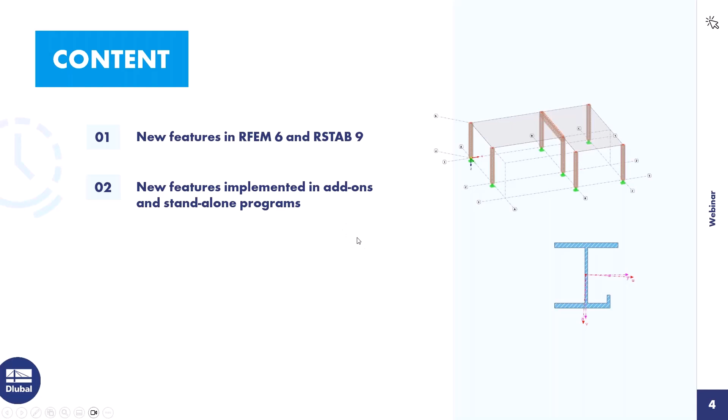Okay, then I come to the agenda today. First point is new features in RFEM 6 and RSTAB 9. I introduce some features that we implemented in about the last year. Then new features implemented in the add-ons and standalone programs. The first point is for features that are directly in the main program, and those features are in the add-ons and standalone programs. Then I introduce new add-ons, and the last point is prospects. I give an overview of what we schedule to implement in the next time.

The main presentation is in PowerPoint, but I will also introduce some features directly in the program, but only for features that are in RFEM 6. I think those are the features that most of you are interested in.

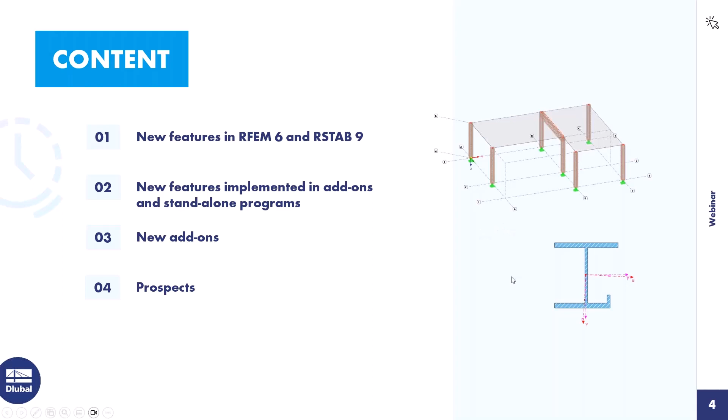Okay, then I come to the first point, new features in RFEM 6 and RSTAB 9. First feature, support force transfer from other model. We implemented a load wizard for that, and you can transfer reaction forces as nodal or line loads from one to the other model. I will show that in the program.

But I turn already to the next feature, new interfaces. We implemented the Tekla Structures bidirectional interface, then the STEP interface, then RSF for Allplan, and SVG. Those are vector graphics. So then I turn to the program and I introduce the first feature, the load wizard for the support force transfer.

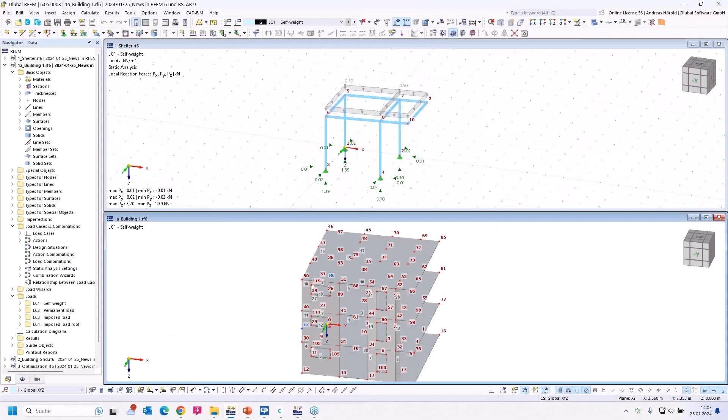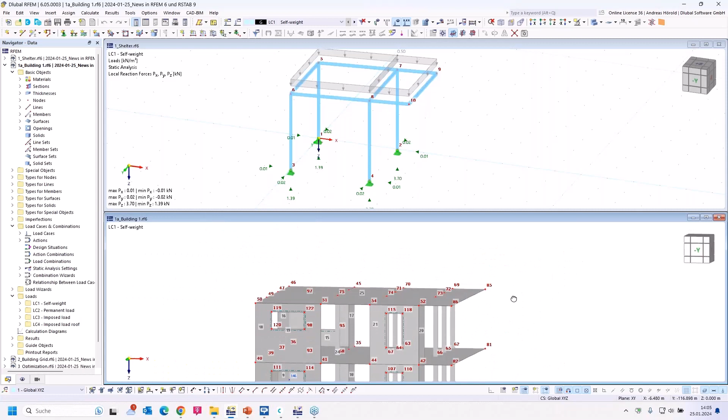So I prepared those two models. That's a small shelter that should stand on that roof here. And the 4 columns should stand on these 4 points. I select only the roof slab so that we get a better overview. So that's quite better.

And now I turn in the menu to Insert, Load Wizards, where you can see all the load wizards, the member loads wizard, and snow load and wind load wizards. And that's the new wizard. And I open it. Important information: when you want to transfer a load from one to the other model, the models must be placed in one folder in the Dlubal Center.

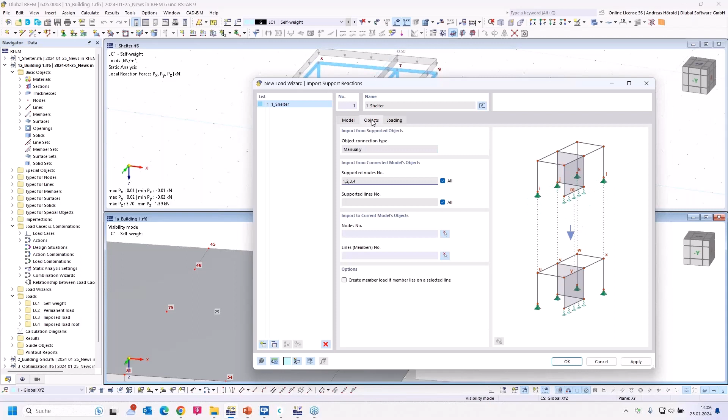So I have several models in one folder. Those are the models for today, and that's number 1. And the shelter is correct for the building, that's why we can leave that. I turn to the next menu, objects.

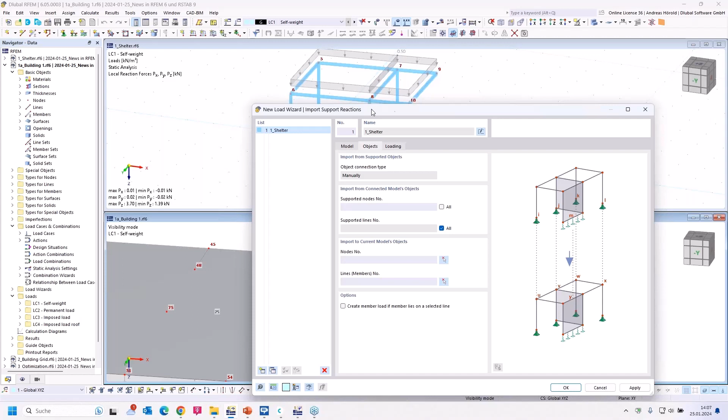You can select the supported nodes in the shelter model. I can select all or only different nodes, when, for example, not all columns should stand on the next model. Okay, I select all. We have only nodal loads, no line loads, but it would be the same workflow.

If you have, for example, under those line supports a member in this model, then you can check that to create member loads on the selected line. Then we turn to loading. You can apply the line loads as uniform load or varying load. That depends on you.

Then you can choose the connection type manually or automatically. Manually, you can select the different load cases and so on. I have in the shelter model only one load case. That's why I can do that automatically. But you can define in this table all the different load cases: load case 1 to load case 1, load case 2 to load case 2, or something like that, if you want. Then you have to select the direction.

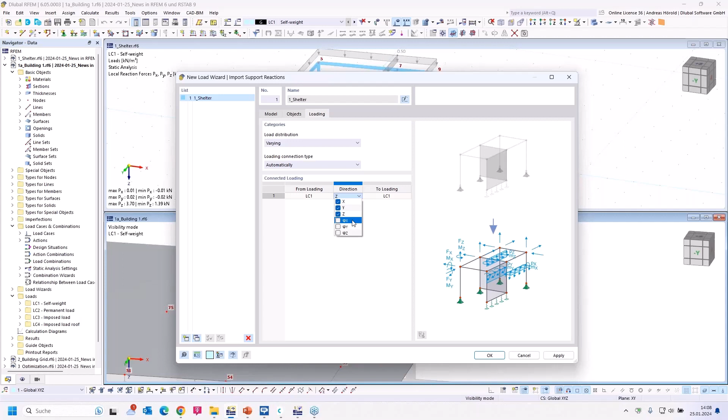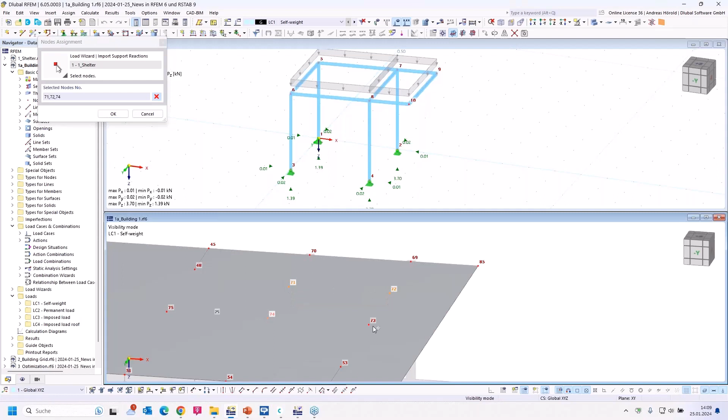I select all three directions. You can also transfer moments if you have a rigid nodal support, for example. Okay, that's all. So, I forgot something. I have to select the nodes in the building model. So I select them in the right order. Okay, now all is fine, and I can press OK.

And you see the loads, but with a question mark; they are not calculated yet. I have to start the transfer by calculating it. Now the program connects both models and transfers the loads from one load case to the new load case. And you can see, I can compare the support reactions, and in the opposite direction acts the nodal load. 3.7 on this side, and on this side 1.39.

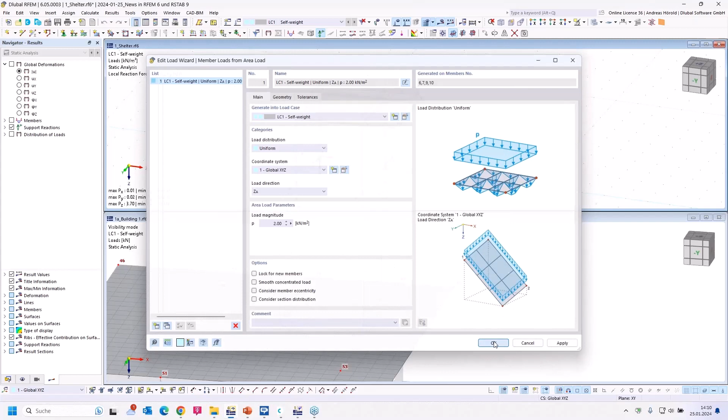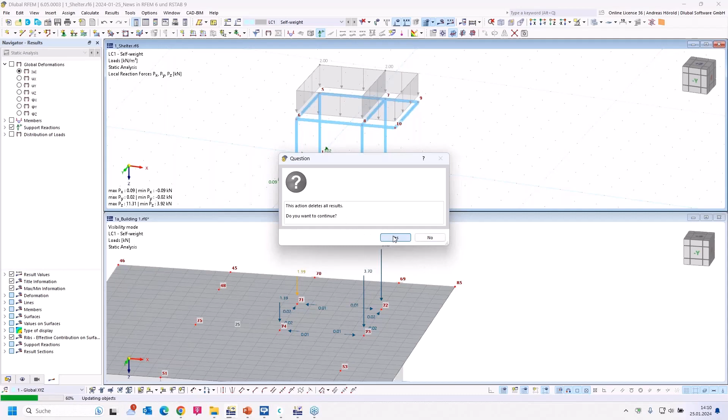So when you change, for example, the load here in the shelter model, I enter 2 kilonewtons per square meter. Okay, then I calculate the load case again. Then I save it. So then comes the question: this action deletes all results. It means the results in the building model. Yes, okay. And now I transfer the loads again.

So let's compare the reactions and loads. 11.31, and 3.92. And also the horizontal loads were transferred correctly. Okay, that's all for this feature.

I would like to show you the interfaces. Export, for example, the ASF interface. Then to Allplan, SVG, import, STEP, and so on, and the other interfaces that are already implemented. And then there are also the direct interfaces to Tekla Structures and Revit. You need to install the other application, and then there's an additional menu here. You can transfer models and so on. Okay, I turn back to the PowerPoint.

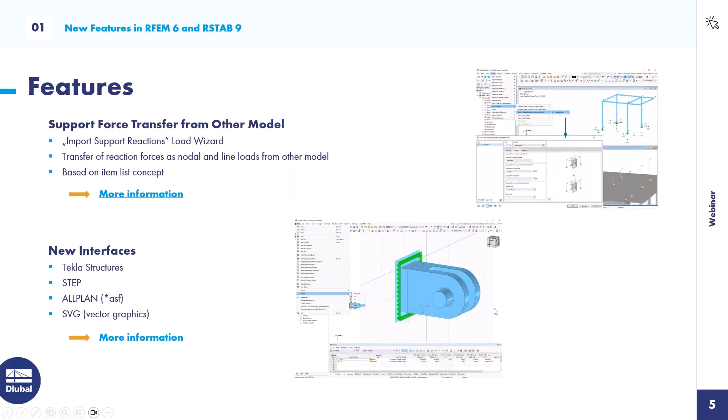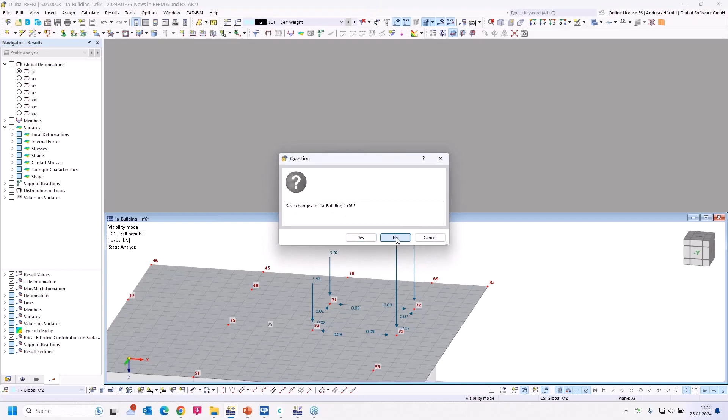The next slide. Building grid is a new feature. You can optionally add dimensions. I show that in the program. So I close these two models. So, simple model. And I go to Insert, Guide Objects, and Building Grids. So that's the menu. You need to enter the dimensions of the grid. Usually they are known, with a space between the numbers.

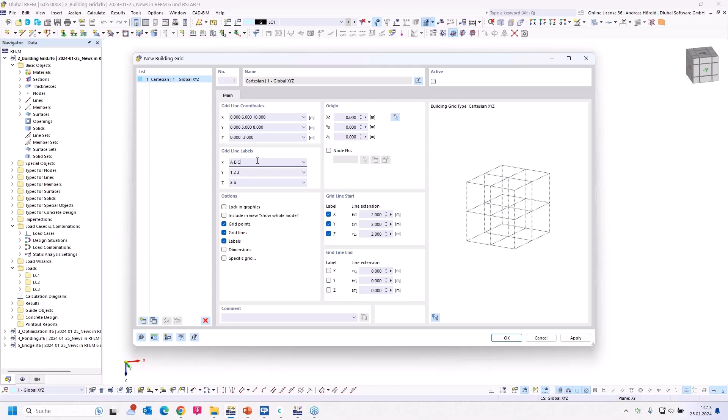Right. And 0 and -3. Okay. And you can already show that in the preview. When I press this button, I can see if it's correct. You can enter numbers here also if you want, rows and axes. I leave them as they are. You can lock it in the graphic.

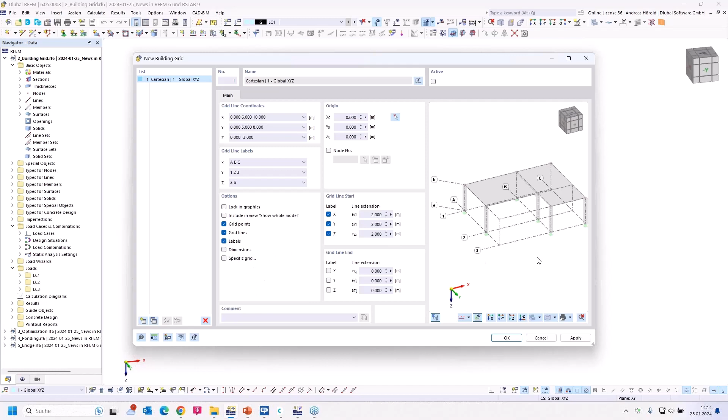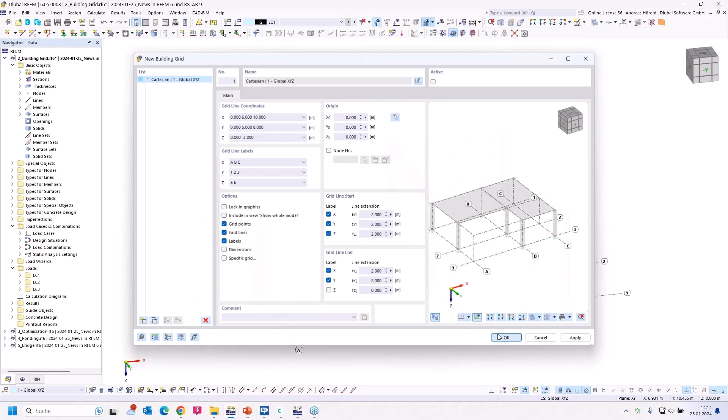You can add grid points so that you can snap to such cross points here. I hope we can see that. Those are the grid lines. Those are the grid points. Labels, you can add dimensions and so on. And if you want to enlarge the lines here, you can select those entries here. So, another 2 meters. That looks quite good. Okay, and that's the line grid. I think quite a good feature.

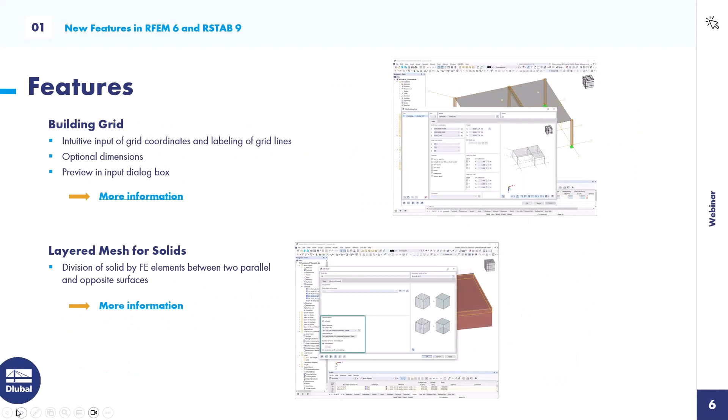So then also use the layered mesh for solids. That's for the geotechnical analysis. For example, if you have a foundation slab with a mesh size of, for example, 0.5 meter, and you have a very deep soil model, for example 10 meters high, then you can define a larger mesh, for example 1 meter. That's the new feature. But you can choose it also for other solids. Oh, that was too far. Sorry. So that's the new page.

Then it's possible to do a superposition of several geometric imperfection cases. We showed that already in a webinar about buckling analysis. That's, for example, for the GMNIA analysis. It's important to have that for such buckling analysis.

Then the new feature is blocks with reference to block specification. Imagine you have several similar blocks, and you can define a mother block. For example, you have more than one truss girder in your model, and when you change something in the mother block, it will be transferred to the child blocks. For example, the height of the truss girder.

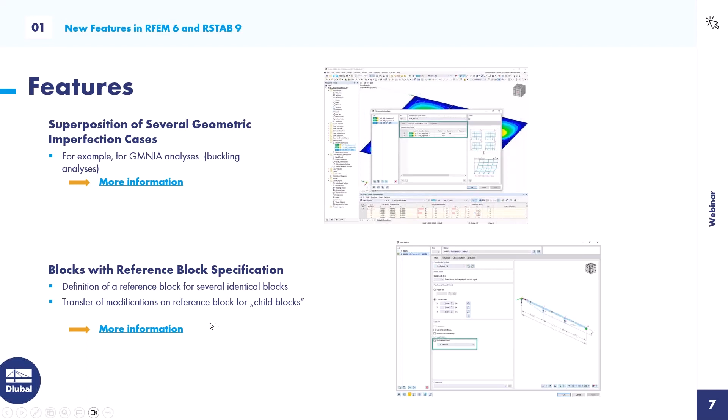Okay, then next page, optimization of cross sections. That's available in the design add-ons like steel, timber, or aluminium design. And you can optimize for a section series or for the width or depth and so on. I would like to show that on such a parameterized cross section.

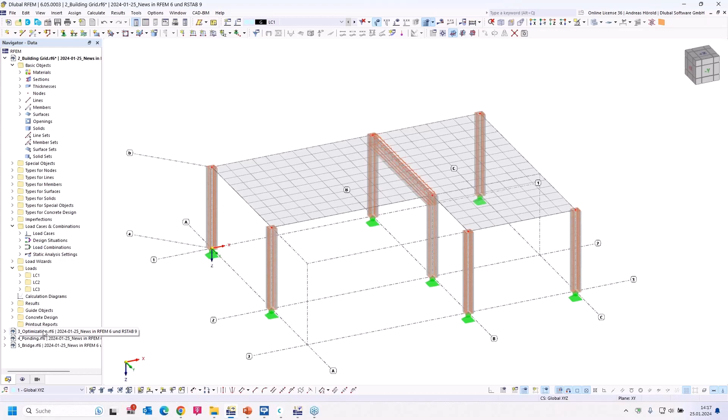I turn to the program. So this model is already designed. Let's go to the timber design. Increase the table. We get a lot of results here. I turn to the input data and to the sections. You can see the 3 sections of this model and the different utilizations.

This section has a utilization of 60.4%. Those are the columns and these upper beams here. And I would like to optimize it. So how to do that? I go to this table here, and I open the drop-down menu and I select optimize current row.

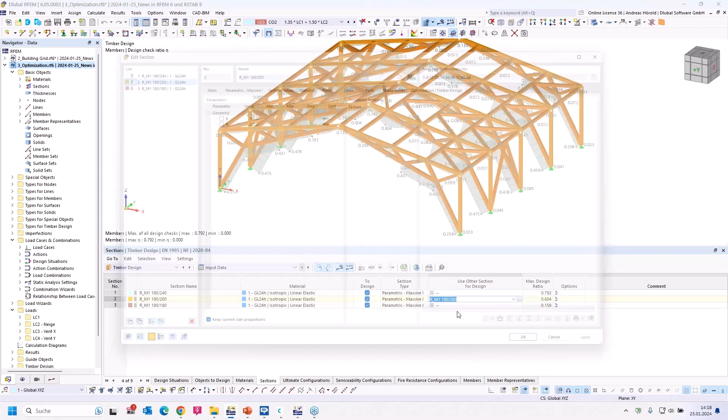So, I would like to optimize the width. We start with 100 millimeters and maximum should be 180. That's the current width, I mean. Then the step should be 10 millimeters. And now you can see in this table the available cross sections. And the program should optimize this cross section.

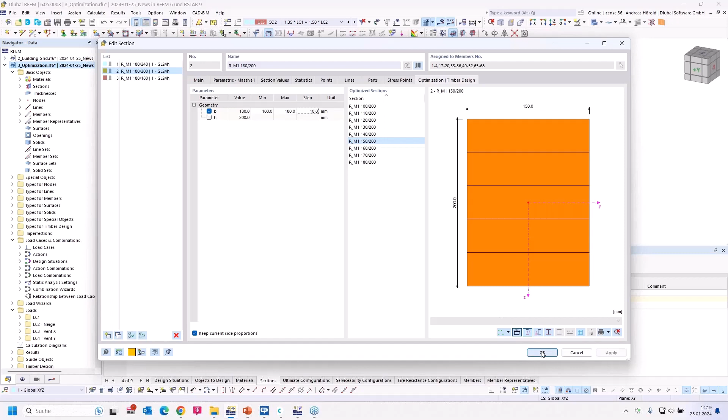Okay. We have to run the timber design again. So we turn back to the input data to have a better overview. Now we have got a utilization of 99%. The optimized cross section has a width of 110 millimeters, but in the global model there is still the old cross section. That's why we need to do a right click here and use the optimized sections in the model.

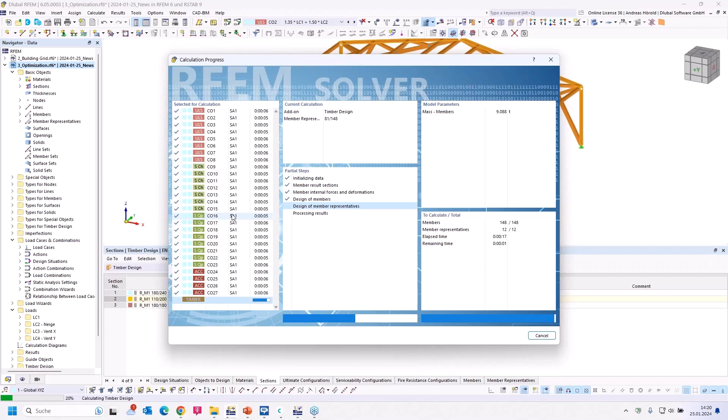And then we have to calculate all again, also the load combinations in the global model. The optimized cross-section has less weight, and now it considers the right cross-section. Okay, let's see what we have got. Now we've got a utilization of 96.5%.

For steel design, for example, you can optimize in one row, or you can define a favorite list, so that the program optimizes for HEA or IPE sections in one step. Okay, I turn back to the PowerPoint.

New feature is the calculation diagram type, 2D story. It's the creation of result diagrams via building axis. It's, for example, necessary for seismic, to visualize the seismic force over the building height. That's one example.

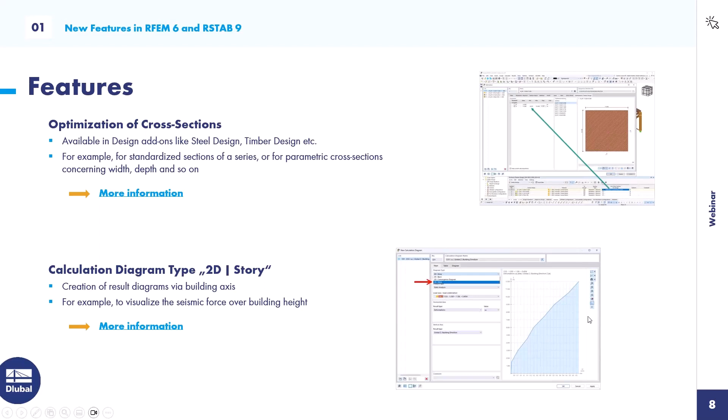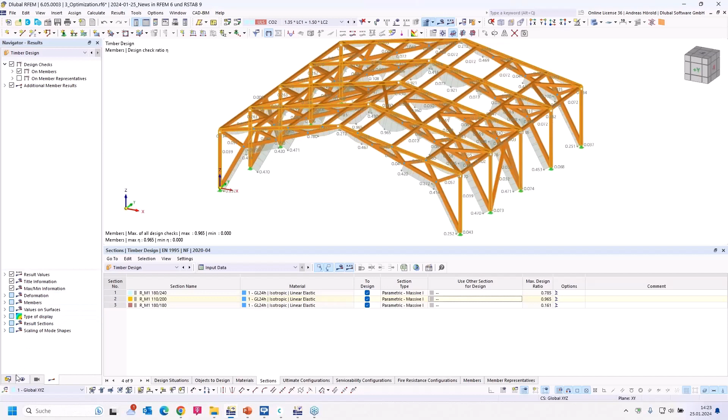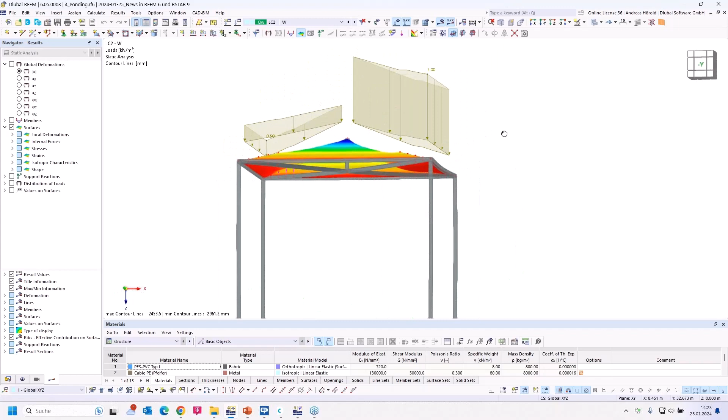I use this model in the program. Just a moment, ponding. So now such a small pavilion, for example, with the load case pre-stress, then wind, and through the wind you get such a deformation. Then the first load case of the pond, I double click on it, and you can see the load type here, ponding.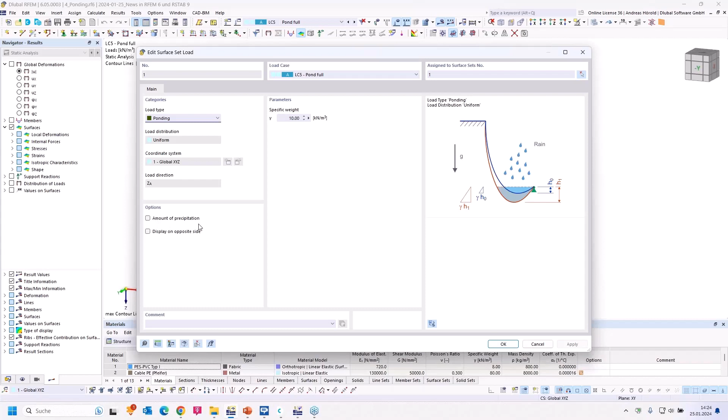You can select the amount of precipitation and then the specific weight, in this case water, 10 kilonewton per cubic meter, and an amount of precipitation of 1 millimeter per square meter. Okay. Then the next load case has 2 millimeters per square meter, and the next load case where we defined no amount of precipitation. It should rain until the pond is full.

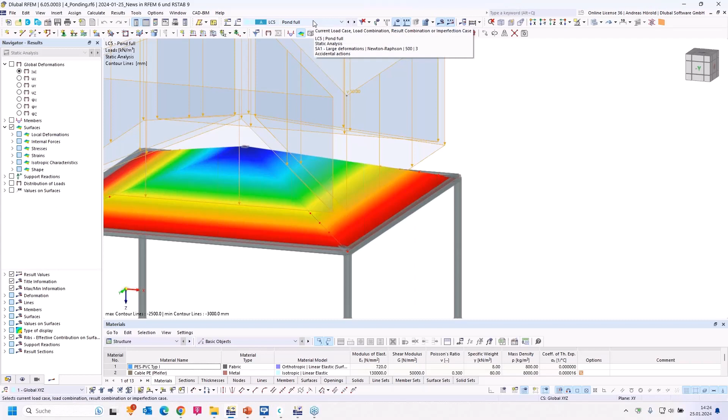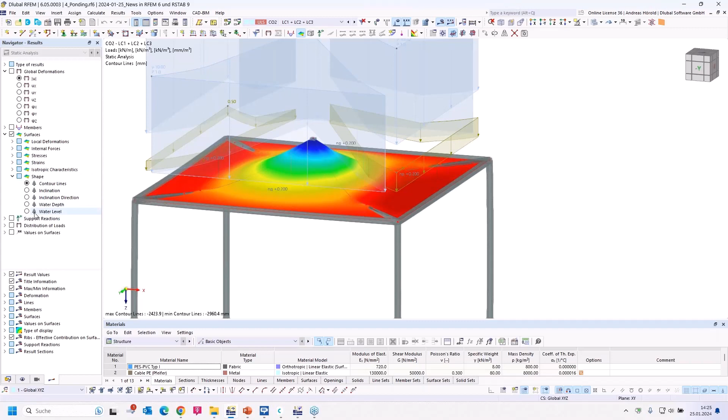And you can see in these load cases there is no deformation, only in the combination with the wind. You have got the deformation from the wind, and at this place water can collect. So let's take a look at combination number 2 with wind and pond 1. And let's take a look in the navigator results, shape, and the water level.

I go to the wireframe model, and you can see that's the pond for this load case, 1 millimeter per square meter, then 2 millimeters per square meter, and full. And now the pond is full, and the rest of the water flows over the edge.

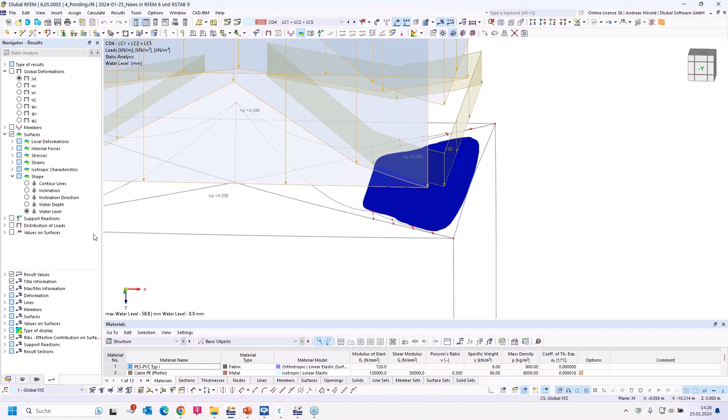And you can also select the water depth on the panel. You can see when it's full, the water depth is about 60 millimeters. Then for this combination, about 40 millimeters. And for this one, about 30 millimeters. Okay, then I turn back to the PowerPoint.

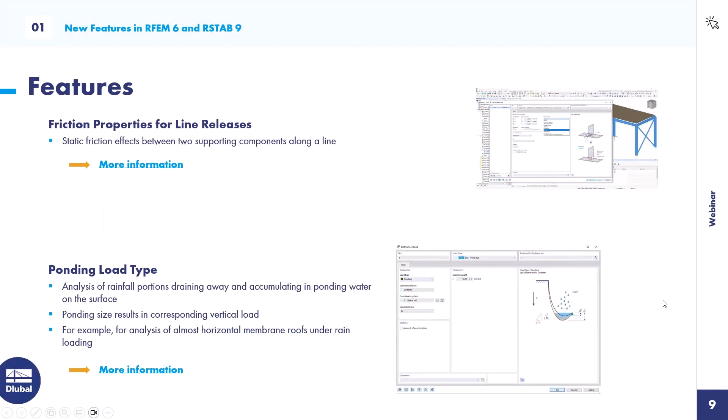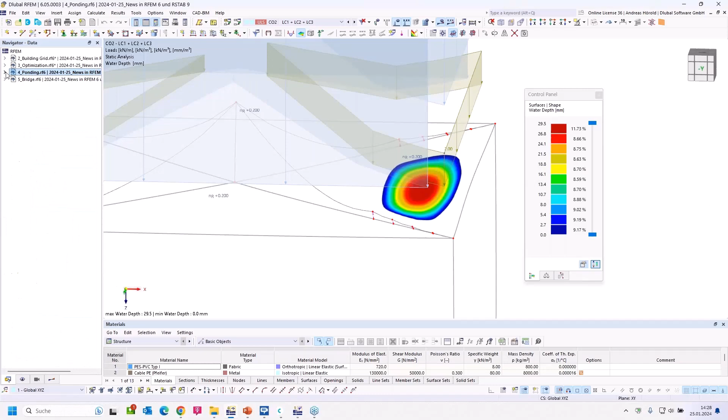Then, I think a very valuable new feature, the cross-section modification using RSECTION. You transfer a cross-section to RSECTION, and you can modify it there and import it again to RFEM. I would like to show that on an example. That's the last model for today.

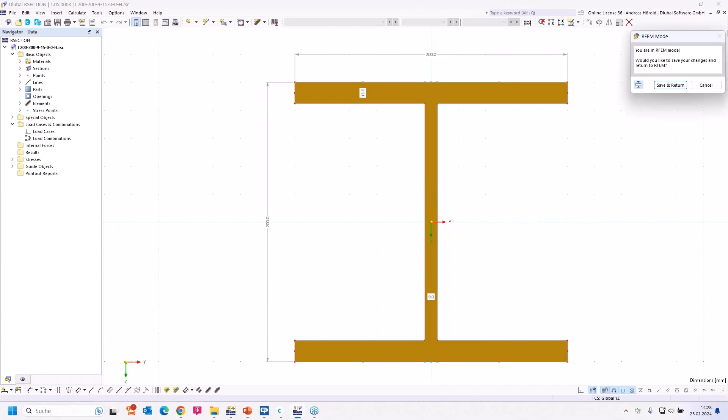So I go to the sections. I would like to change this cross-section. For example, I do a right-click on it, edit. And that's the new button, the transfer to RSECTION. So I press it, RSECTION opens, and for the cross-section you can see the message there, RFEM mode.

So to modify this cross-section, I have to, just a moment, I have to explode it by right-click on the section, explode. Then I modify it a little bit. Now I move that in this direction, minus 30 millimeters. Okay.

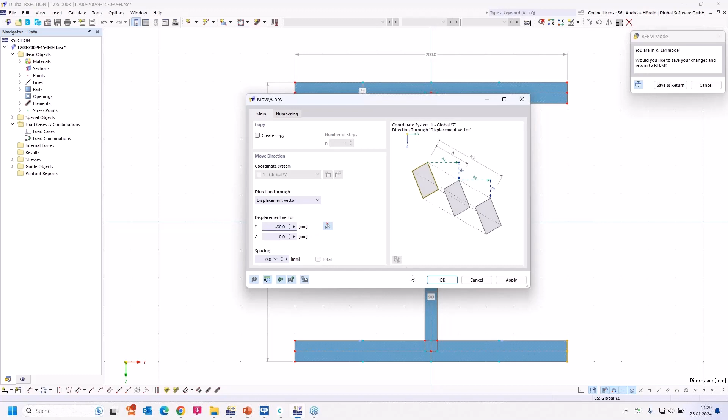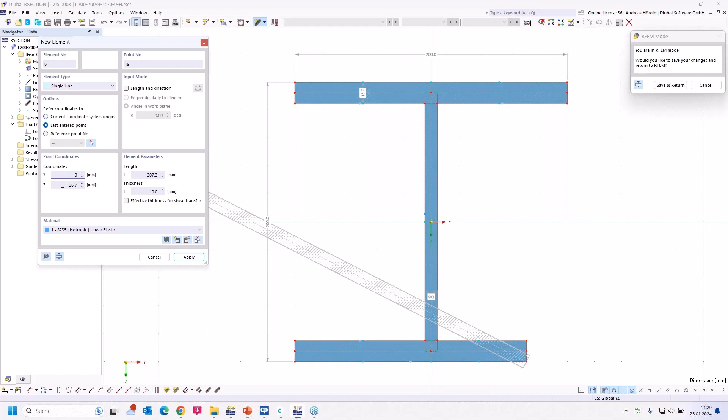And I add a new element, a line with a thickness, a small sheet. So that's the start point. Then I enter the new coordinates, minus 40, for example. Thickness 10 millimeters, that's okay. I apply that. And then I would like to transfer that back to RFEM. I have to press save and return.

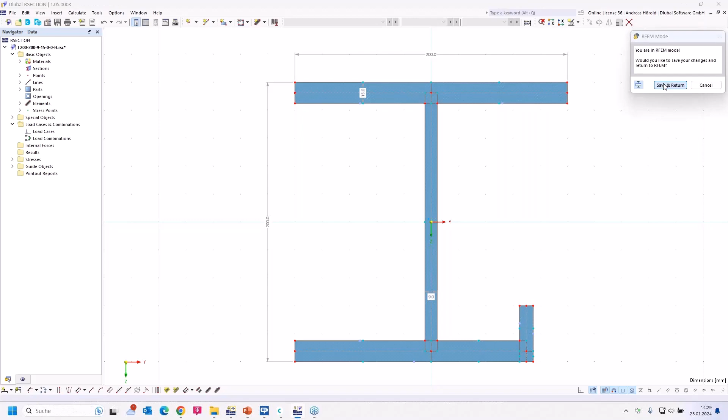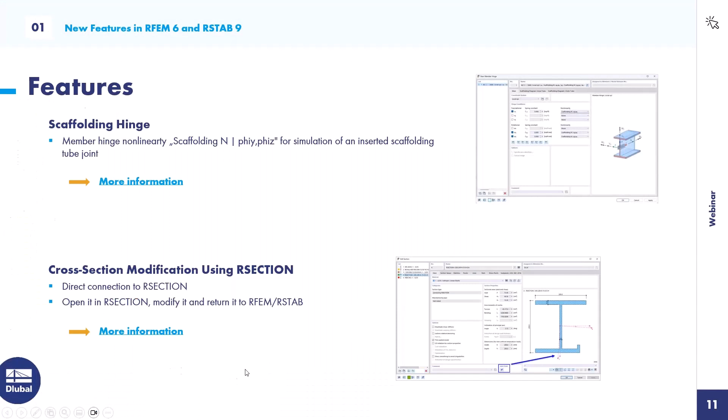So now we are back in RFEM, and you can see the modified cross-section. And now you can use it for the further calculation. Let's take a look at one of these members. Now you can see the modified cross-section. Okay, let's turn back to the PowerPoint slide.

So new features are also the cloud calculation. Maybe you know that when you have a larger model and it calculates a longer time, the power of your local computer is then less when you work in other programs, and then you can use the cloud calculation. I turn back to the program to show it.

Under Calculate, you can find Calculate in Cloud. And you can choose the machine type automatically or Microsoft Azure, and you can select one of these machines. But you have to buy credits for the cloud calculation, and this link leads to the web shop.

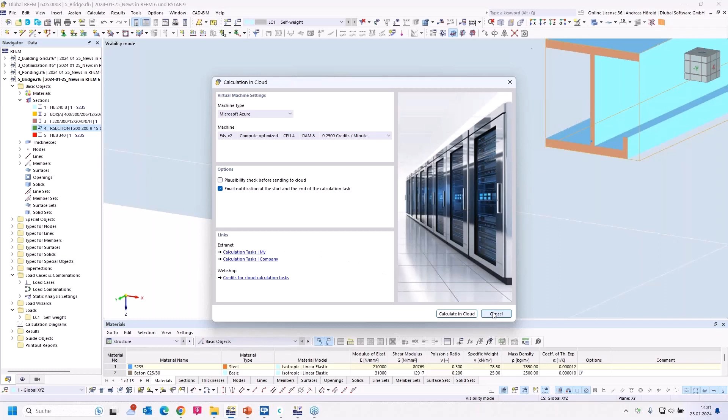And in the Extranet, you can see the calculation tasks of your company or your calculation tasks. I think a very good feature when you have to design larger models. Not for models that calculate 1 minute or so, but for larger models.

Then a new feature are the info bubbles for line supports. You can activate it in the Navigator - Results. Now, for example, you can see then in the bubble the description, sum, mean value, and so on.

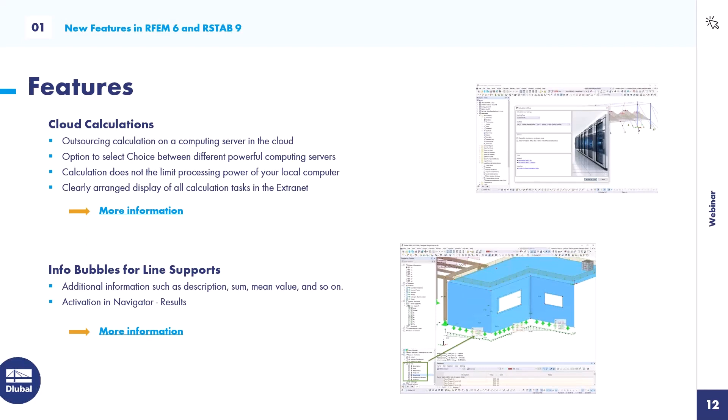Then the next new features are valid for the timber constructions, but you have to define it in RFEM directly. That's why I've added it here to the new features in RFEM 6 and RSTAB 9. The shear force reduction. You can reduce the shear force with that new feature for an optimized design with a smaller or reduced shear force.

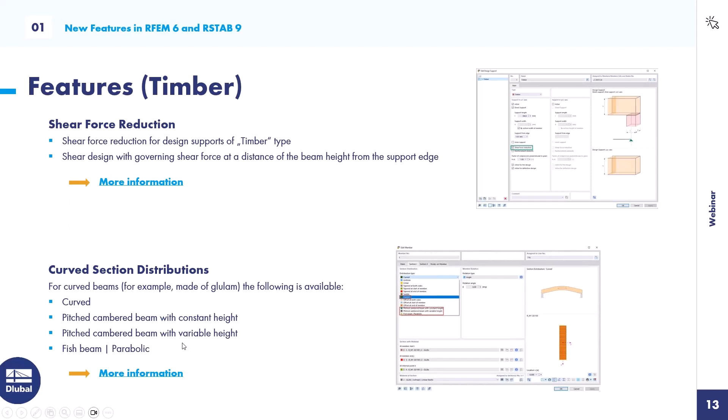Then a new feature is the transversal compression stiffening elements for design supports, when you can support it with screws here. Oh, sorry, that was already the next slide. And shear resistance is checked in the plane of the screw tip, and also a bolt analysis for pressing in and buckling.

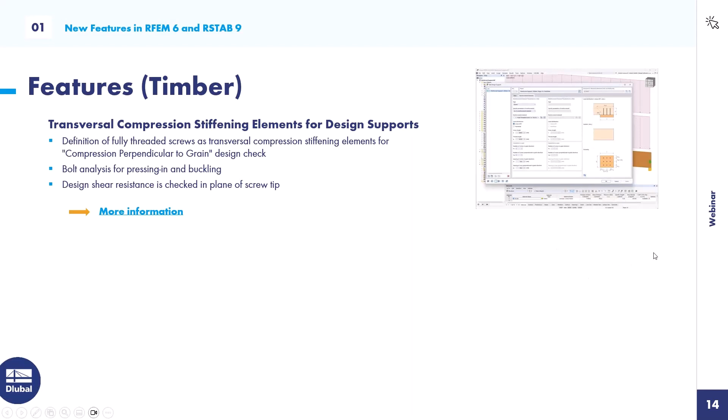Then we turn to the next point, new features in add-ons and standalone programs. I continue with the timber design add-ons. You can consider the crack factor, kcr, for surfaces. Then the design of LVL members is possible according to Eurocode 5, where 4 manufacturers are available: Pollmeier, Metsä, Steico, and Stora Enso.

More features in the timber design add-ons are for the Swiss standard, the design of cross-section of Massive I type. We implemented the Australian standard, and the design of CLT panels is not only available for the Eurocode, but also for the Swiss standard and US and Canadian standard.

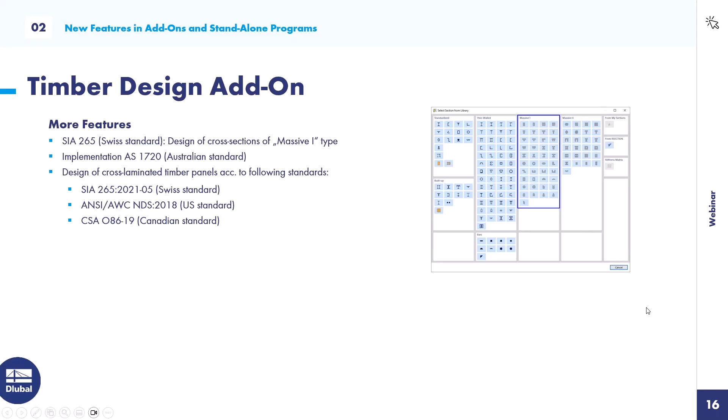Then the multi-layer surfaces add-on, where there's a library of manufacturers for CLT panels, for example Binderholz, Derix, and so on. There are also more compositions for the USA and Canada.

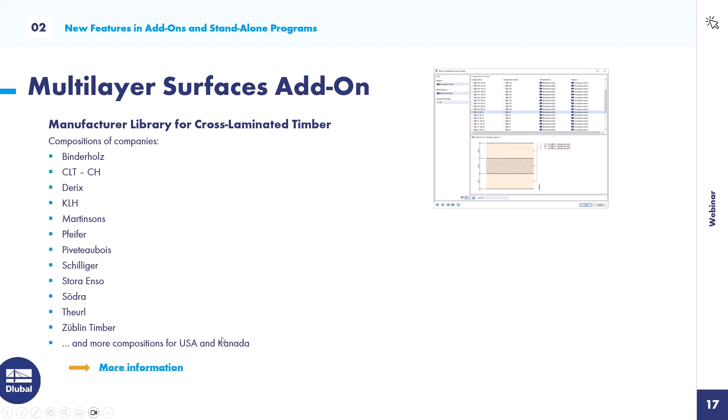Then a lot of new features in the concrete design add-on, the design of RSECTION cross-section. You can define a cross-section in RSECTION, with the longitudinal reinforcement and also the shear reinforcement. Then you can transfer it to RFEM or RSTAB and design it there. We already showed it in the webinar.

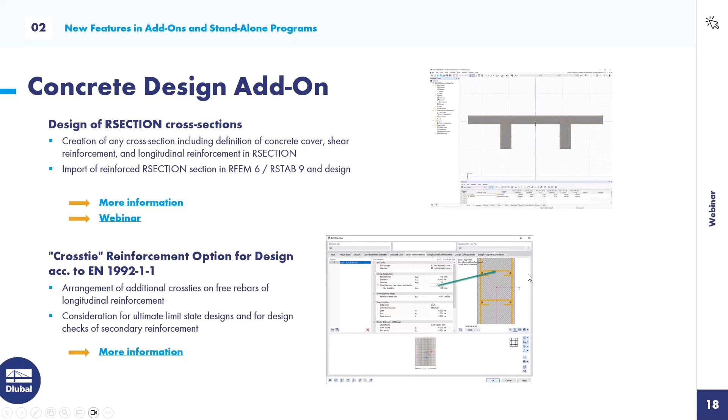So then it's possible to design fiber reinforced concrete. We already showed that in a webinar. Just click for more information on that link or watch the webinar.

Then a fatigue design is possible, and we implemented 2 different methods here in the program or in the add-on.

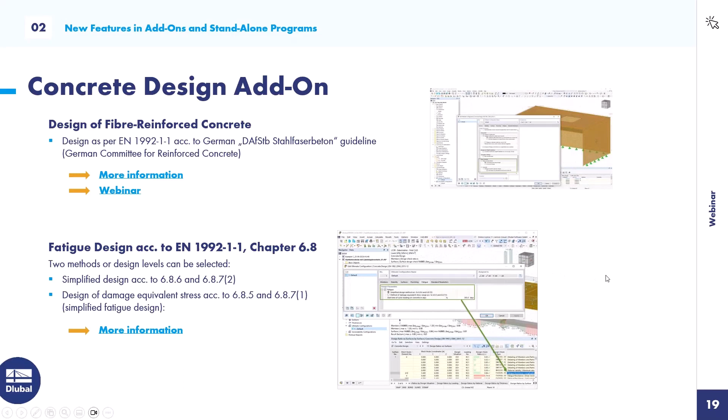Then the seismic design according to Eurocode 8 is now possible. We showed it also in a special webinar. If you would like to get more information, just watch the webinar. I added the link here.

Then a simplified fire resistance design is now possible according to Eurocode 2 for columns and beams.

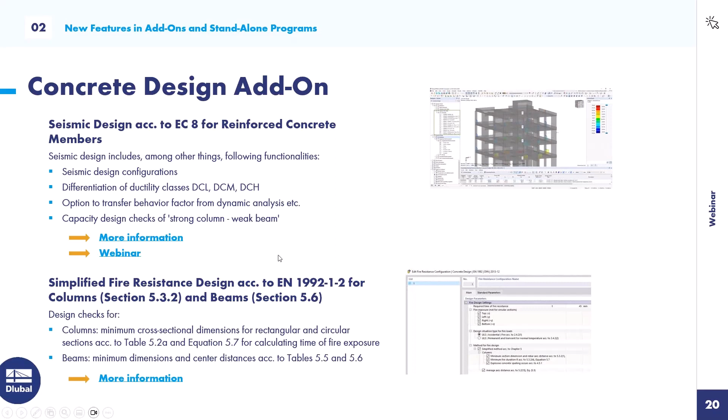So then a new feature is the layout of surface reinforcement. Now you can select what you want to lay out, or what the program should lay out, the rebar diameter or the rebar spacing. Often wished-for feature, and we implemented it.

Then use the required reinforcement for serviceability limit state, and you can print graphics via print templates now.

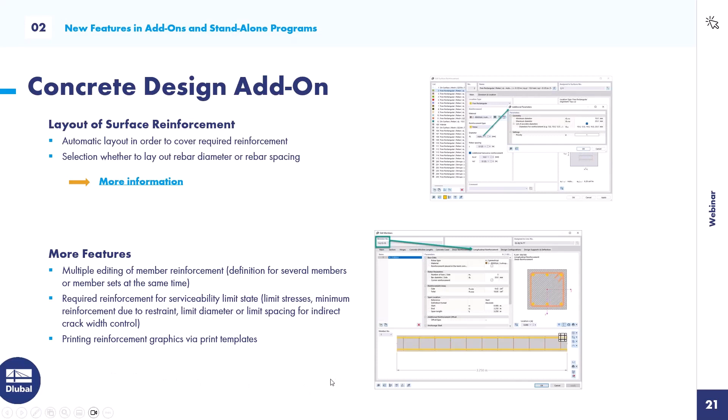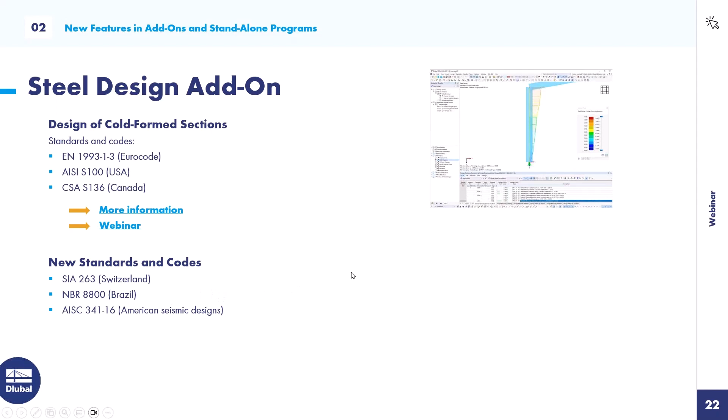And for the normal steel, we implemented new standards: the Switzerland standard, then for Brazil, and the American seismic design is now available.

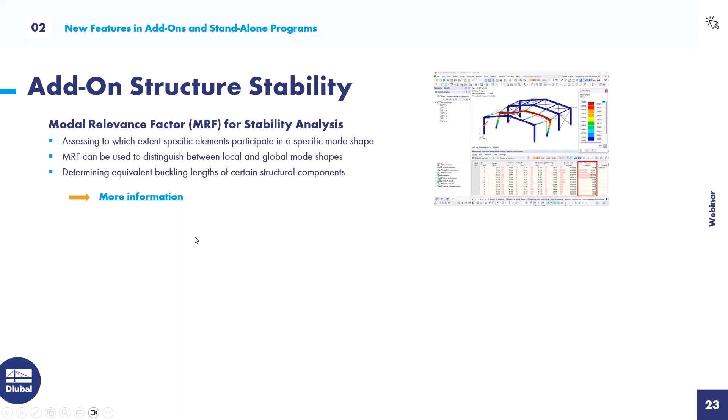Then there are a lot of new features in the steel joints add-on. Steel joint design for built-up and thin-walled cross sections, according to Eurocode and the American standard. Then there are new components: the connection plate, member editor, inserted member.

Now you can, for example, insert a member that won't be considered in the global program. Then an auxiliary solid to cut something out. Then a cap plate, for example when you want to define a cap plate on the top of a column, then you can use that. And it takes you only a few steps.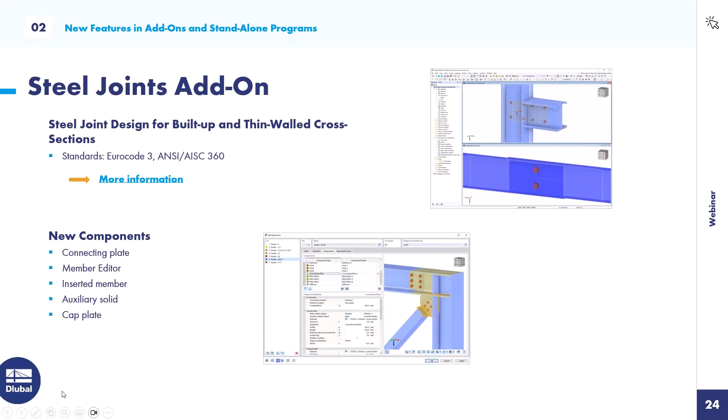Then the welds are designed now plastically. It's more effective than before.

Then you can calculate the initial stiffness for the normal force and the moments, and the multiple selection is possible. And then you can find it in the table.

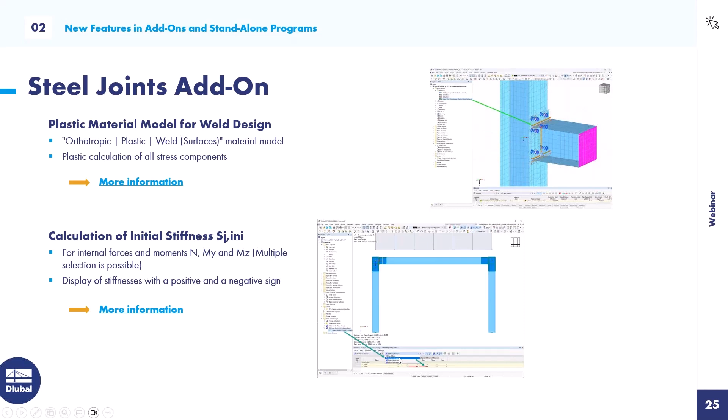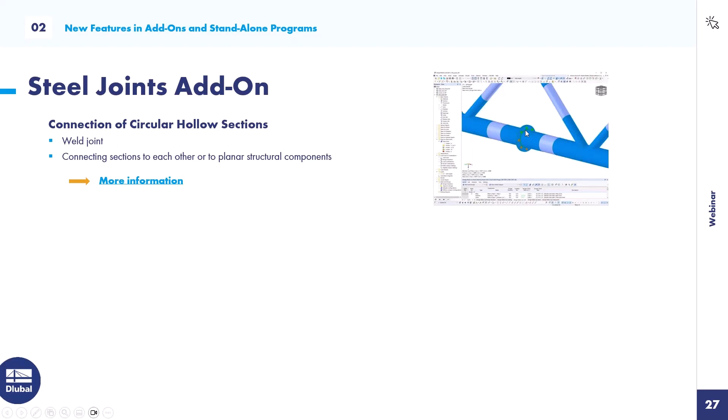Then now the circular hollow sections are available with a weld joint. You can see the connection of the sections, of one section to another section, or to planar structure components. You can see the weld here, and also there's a weld.

Okay, then the building model add-on. The floor analysis of detached structures is available. You can calculate the global model, and then you can calculate local, doing a 2D calculation of individual floors. For example, in that image here, you can see the roof slab.

Then the load transfer only story type, without any stiffness, collects the loads and transfers them to the next element.

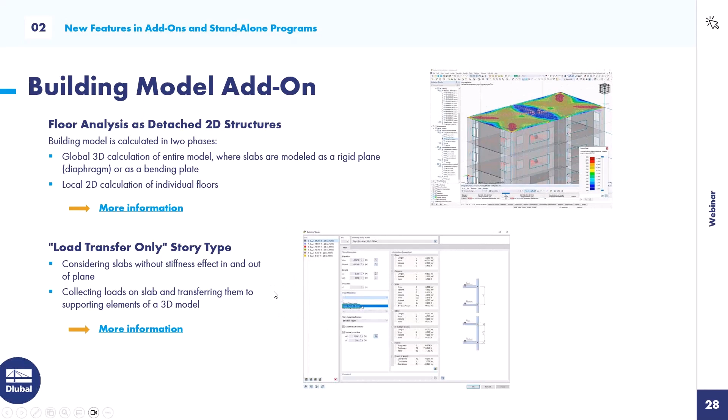Then there are different modeling tools for building models: vertical line, columns, and so on. More features are the shear walls, defining of deep beams, and the building story generator.

The building story generator lets you create all building stories with one click. When you have got such a model, with one click, all building stories are defined.

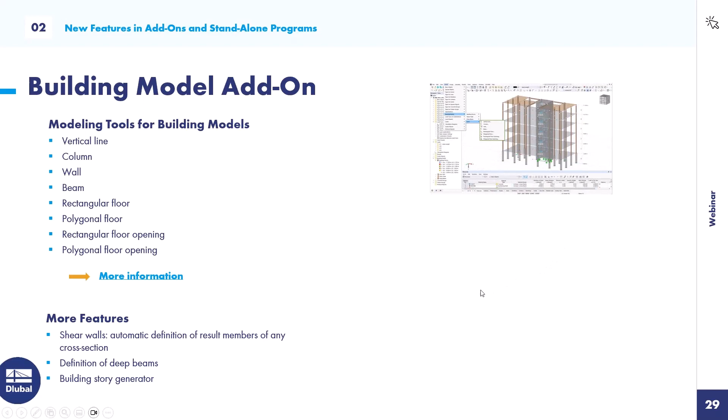Then add-ons for the dynamic analysis: the automatic operation to reach a specific effective modal mass factor. It's an often wished feature from our customers.

The program determines the count of eigenvalues until, for example, 90% of effective modal mass is reached. You don't need to do that manually anymore.

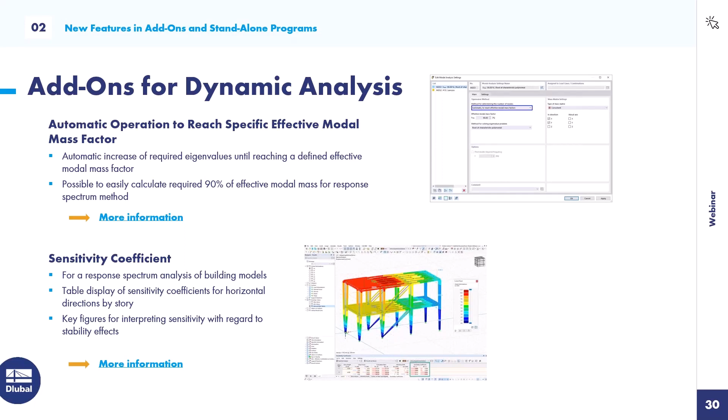Then the sensitivity coefficient is new. Key figures for interpreting sensitivity with regard to stability effects for building models.

So then RSECTION, the plastic resistance with variation of shear stresses, that's available for the plastic capacity design according to the simplex method. It's an effective design if you choose that. For example, the program applies the normal stresses on the flanges and the shear stresses on the web.

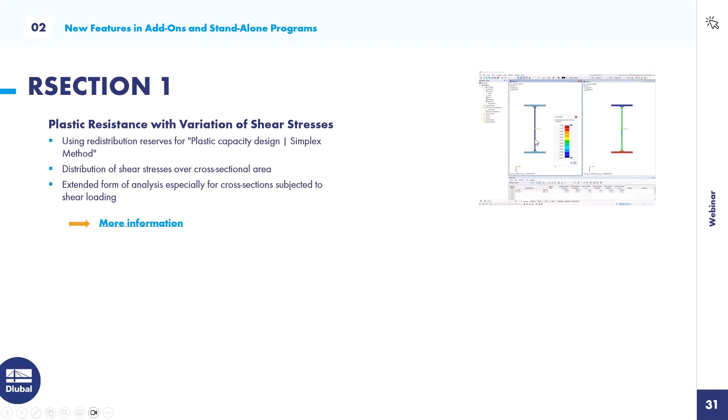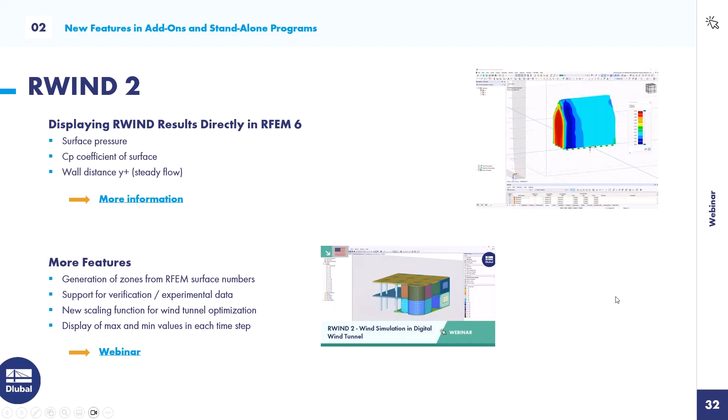Then the third point of today: new add-ons.

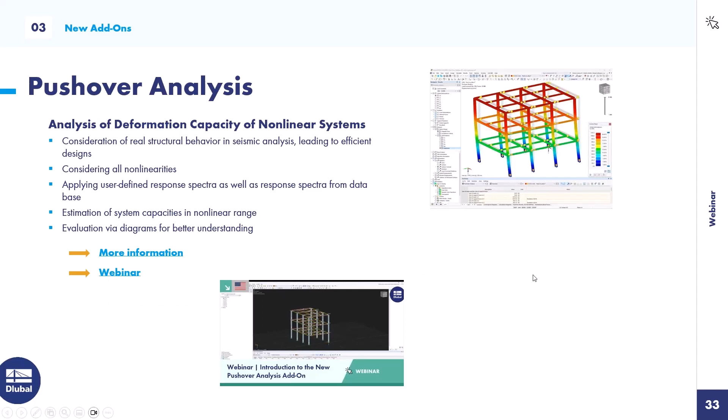There's a new add-on, pushover analysis. We already showed it in a webinar. You can consider the real structural behavior in seismic analysis, and it leads to an efficient design. Just watch this webinar if you want to use the pushover analysis.

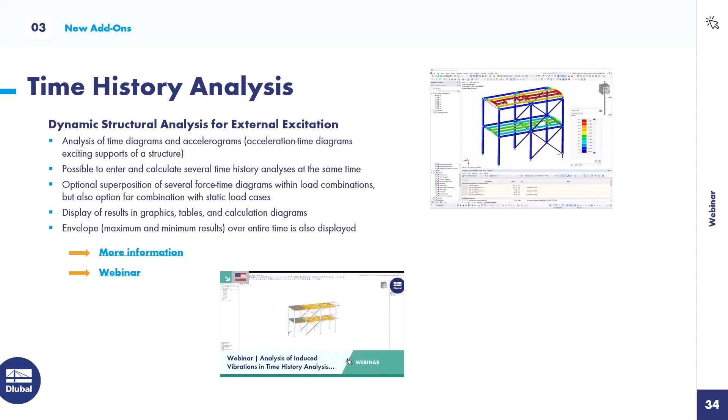Then another new feature, also for the dynamic analysis, is the time history analysis. It's an analysis of time diagrams and accelerograms. In this webinar, if you want to watch it, just click on the link, and you can see that we applied it, or did a design for machine-induced vibrations.

So then the fourth point of today: the prospects.